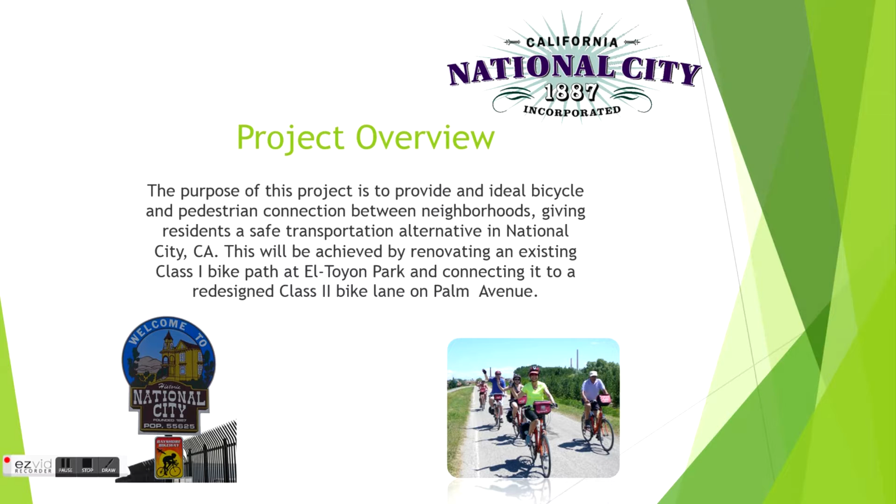My name is Christian Aguilar, and I am the project manager of DVA and Associates. This video is for the El-Toyon bicycle route in National City, California. The purpose of this project is to provide an ideal bicycle and pedestrian connection between neighborhoods, giving residents a safe transportation alternative in National City, California. This will be achieved by renovating the existing Class 1 bike path at El-Toyon Park and connecting it to a redesigned Class 2 bike lane on Palm Avenue.

This is the DVA and Associates team. We have Christian Aguilar, Project Manager, Specialist in Transportation and Construction. Rudy Zelaya, Specialist in Construction. Michael Donvecchio, Specialist in Transportation and Structural. Daniel Diaz, Transportation Specialist. Elizabeth San Pedro, Stormwater Specialist. And Daniel Lopez, Transportation Specialist.

This project is taking place in National City. National City is a dense urban community with a median income of $37,000. This plan will be put on through various programs: the National City Capital Improvement Program, the National City Bicycle Master Plan, and the Active Transportation Grant that was awarded in 2014 for this specific project.

In National City, the current facilities and existing conditions are as follows. There is a current bicycle path about half a mile long that is in serious need of improvements. There is a current street, Palm Avenue, that is a collector street with a posted speed limit of 35 miles per hour. It has parking on both sides of the street currently, and as of now, there is no bicycle path or Sharrow designation for bicycle riders. As for current bicycle facilities in the vicinity, there is 4th Street, which has modern bicycle facilities, Class 2, and it will be critical to connecting our proposed plan and making it one universal route.

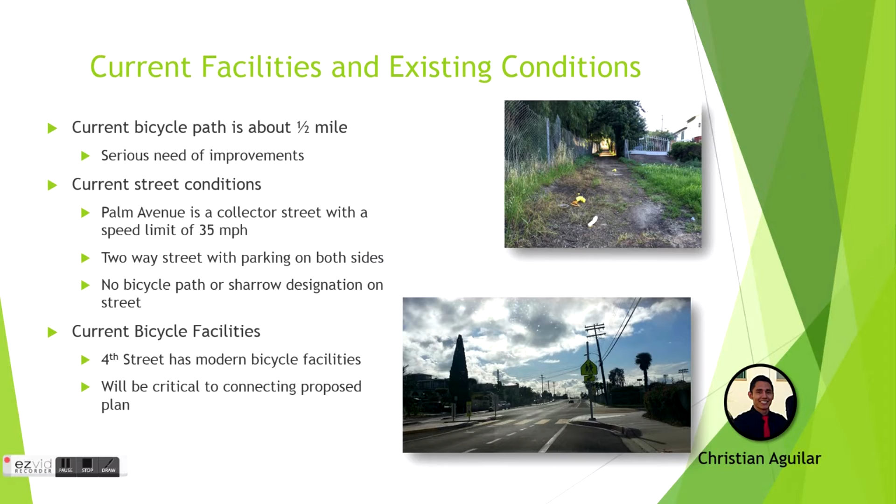Before designing the El-Toyon bicycle path, several steps in planning and research had to be considered. In regards to the site research, pedestrian and bicycle counts were conducted along each alternative. In addition, traffic counts and parking usage analysis were performed. This research would eventually aid in our decision of which alternative worked best for our project. To aid in our planning, the National Association of City Transportation Officials, NACTO, Seattle Broadway Bikeway, and U.S. Federal Highway Administration were utilized.

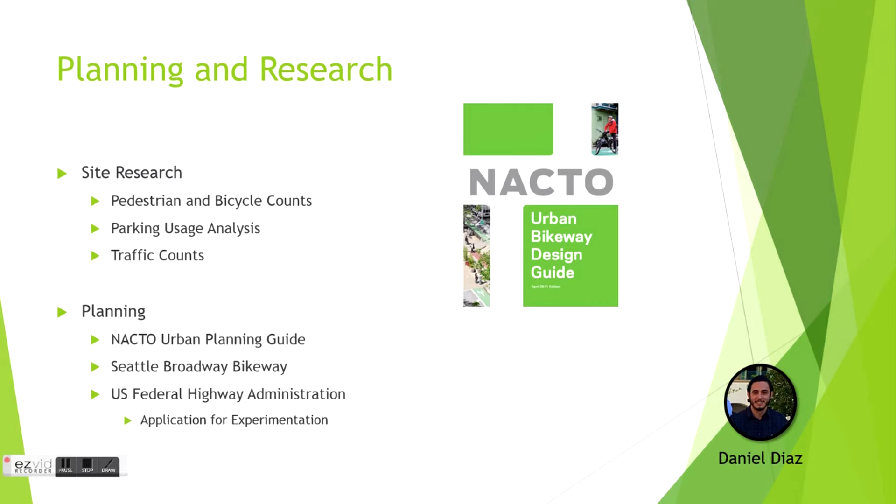DVA and Associates decided it would be valuable information to have an understanding of the pedestrians, bicyclists, traffic, and parking activities. As a result, studies were conducted and it was determined that Palm Avenue had the lowest average speed of approximately 35 miles per hour, a parking availability of 50% during peak hours and 70% during non-peak hours, and also it had the highest pedestrian and bicyclist activity.

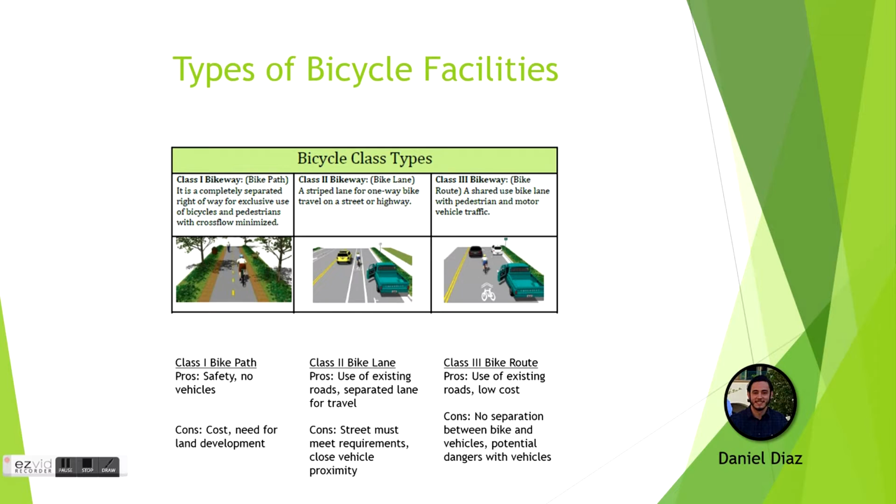One of the main aspects of our project was determining the classification of the bike facility. A Class 1 bike path would be most safe because it is completely separated from vehicles and is exclusively used for bicycles and pedestrians. A Class 2 bike lane is a separated striped lane on an existing road. This option is less safe as cyclists are closer to vehicles. Finally, a Class 3 bike route is a shared bike lane which is used by both cyclists and motor vehicles. This facility is the least safe of the three options.

In order to choose the best alternative, we decided to compare 3 possible routes. These routes ran along Euclid, Grove, and Palm from 22nd Street to 4th Street. Each route was selected based on their proximity to sites of interest such as schools, parks, shopping centers, and bus stops. With this being said, 3 different studies were conducted on each alternative in order to determine which one was the safest and most effective route to be utilized by pedestrians.

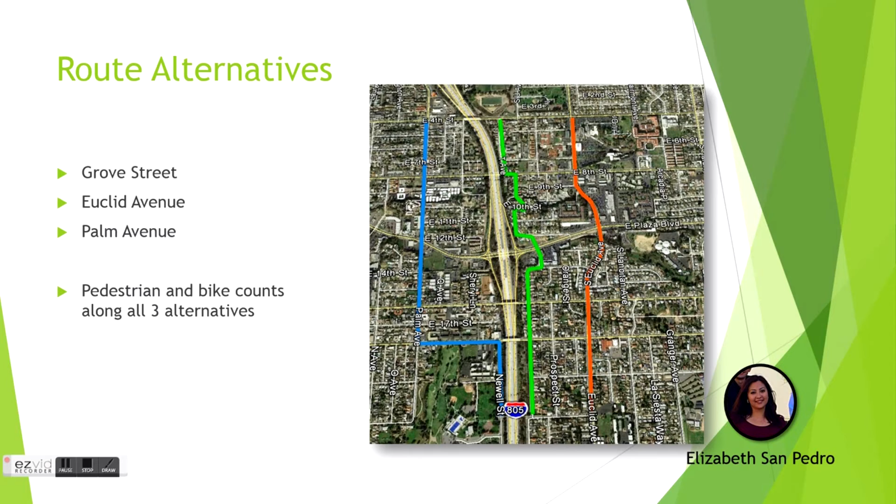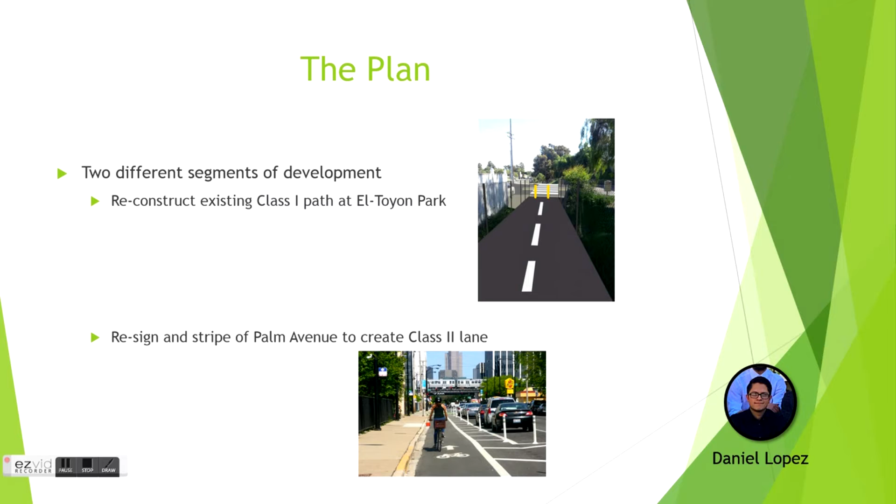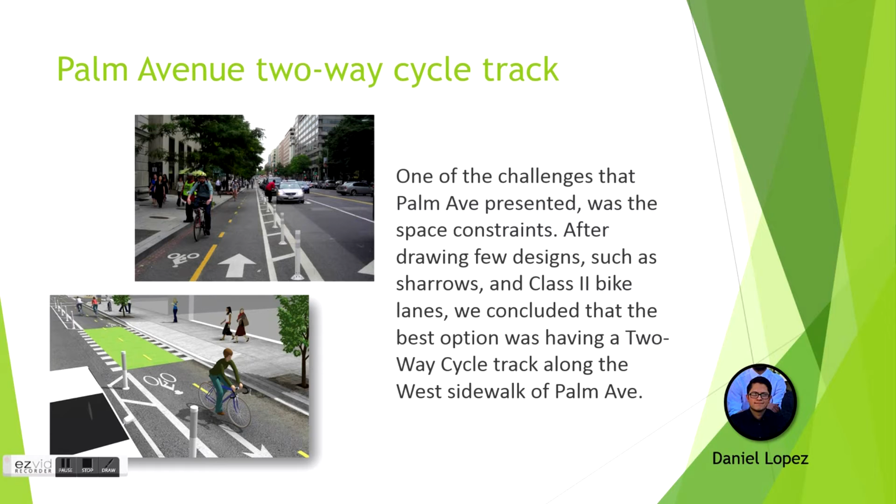The plan includes 2 different segments of development. The first one is to reconstruct the existing Class 1 path at El-Toyon Park, and the second one is a re-sign and restripe of Palm Avenue to create a Class 2 lane. The on-street portion of the corridor along Palm Avenue, 18th Street, and Newell Street has relatively low volume and low speeds and requires minimum, if any, volume and speed reduction measures.

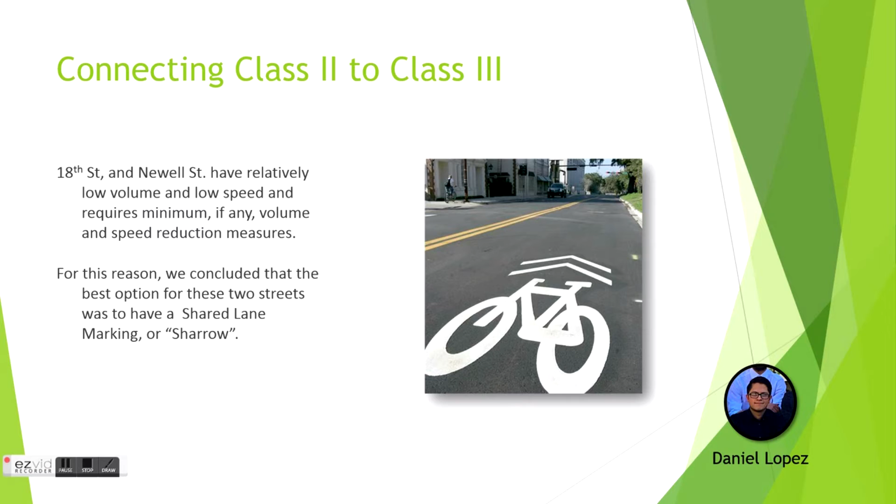Beginning on East 4th Street, at the corner of El-Toyon Park, an existing half-mile-long Class 1 bike path makes its way to South 47th Street. This bike path skirts the west side of El-Toyon Park, stopping on the south side of East Division Street, and then starting back up again on the north side of the street and continuing through to East 47th.

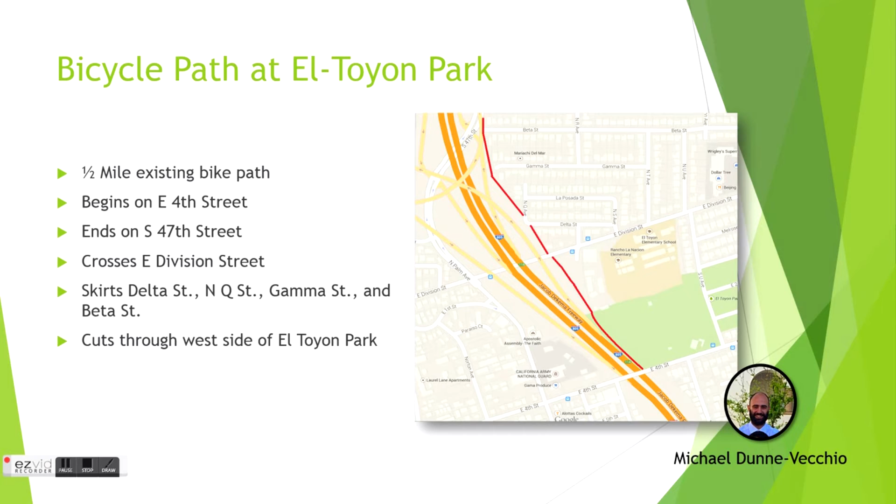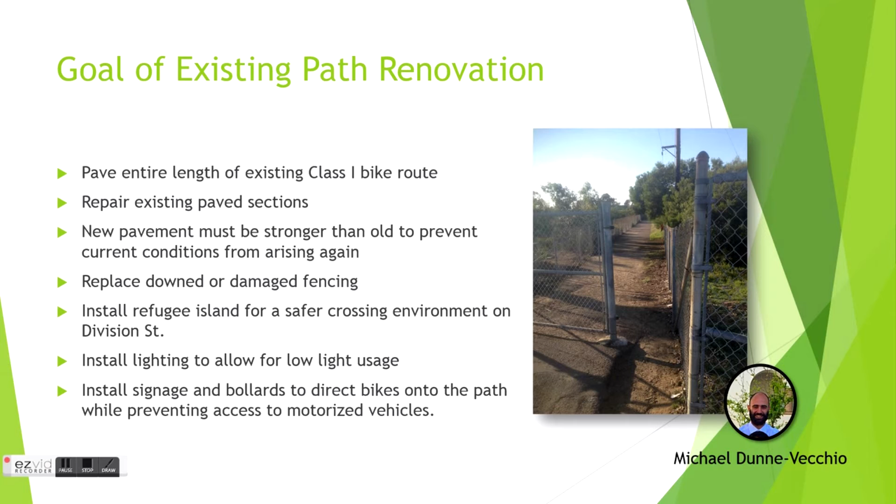Our goal was to revitalize and renovate this portion of the planned bicycle route to make it more user-friendly and appealing to the community. The replacement of the existing asphalt path is a necessity, as the entire half-mile length is in severe disrepair. In a few locations, damage to the parallel fencing will also be repaired, or in extreme cases, replaced entirely. To facilitate safer crossing of Division Street, a refuge island will be constructed.

Solar panel lights will also be installed along the entirety of the Class 1 path to promote the use of the facility at night. Clear signage will be put in place to direct bikers and pedestrians, and removable bollards will be strategically located at entrances and exits to prevent access by motorized vehicles. These bollards will be locked in place and only removable by a city employee or emergency personnel with the proper key.

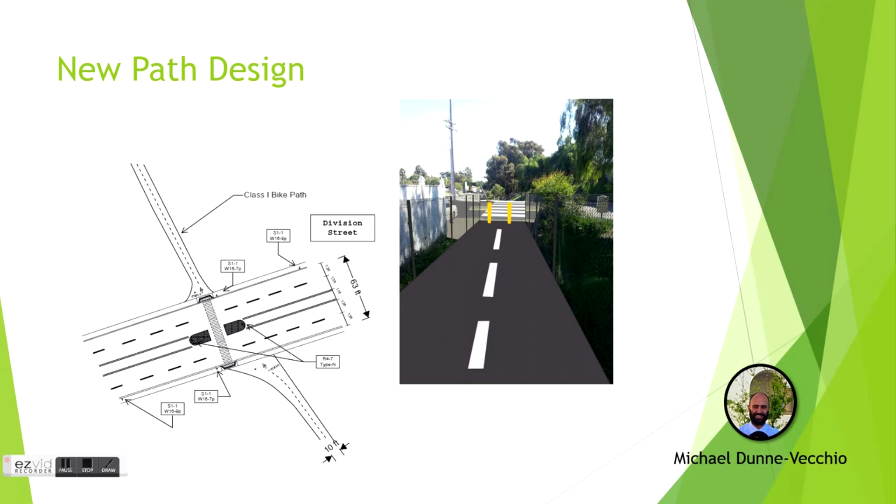The proposed bike path and the Class 3 sharrow markings and bicycle signage along the path will improve the sight and visibility of cyclists and pedestrians crossing at the intersections. The signage and marking will also help to reduce behaviors that lead to cyclist-motorist collisions by increasing driver awareness of bicycles along the bike route.

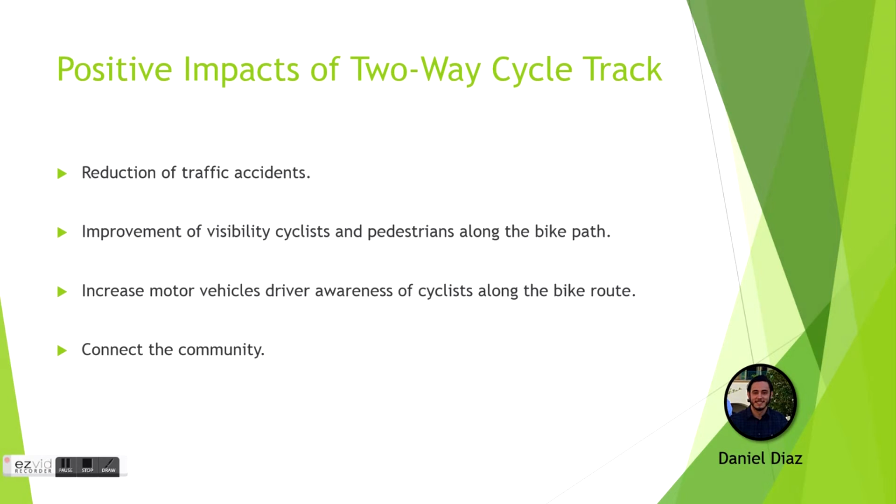In order to properly design the new path, an understanding of the local soil conditions, along with County of San Diego roadway standards, were required. Data on soil type and properties were researched, and path width, cross slope, and thickness were calculated using various tables and equations from the California Highway Design Manual, County of San Diego Public Road Standards, and California's Flexible Pavement Structural Design Guide.

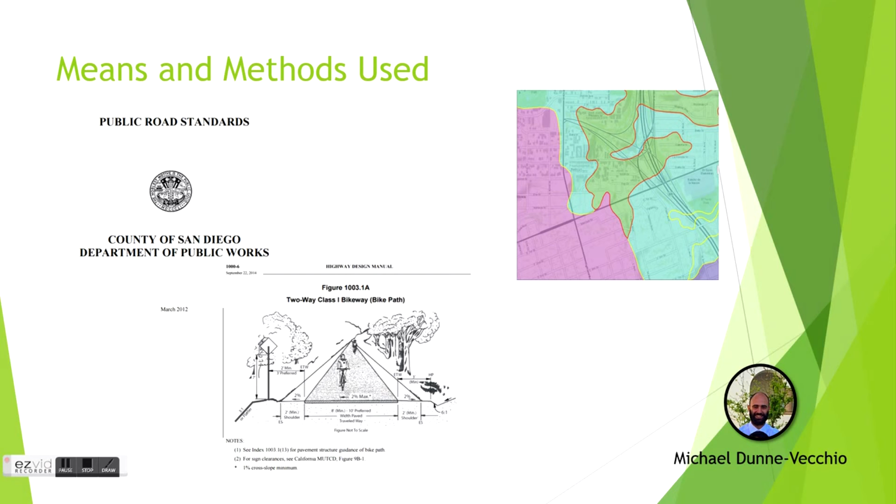The National City Bike Corridor will span approximately 2 miles of roadway. Around half a mile will be demolition and installation of new pavement. The remaining 1.5 miles will consist of a new cover coat of existing roadway, new striping plans, and construction of new pedestrian safety islands.

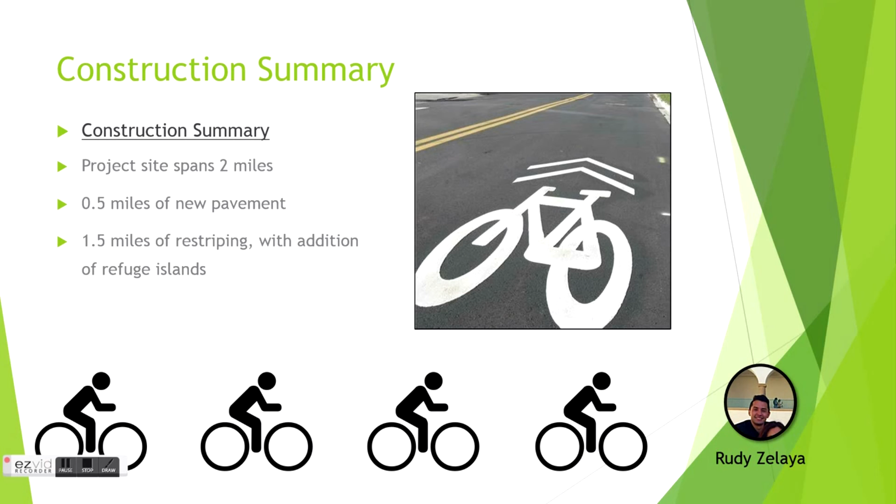The total project budget is $800,372. This cost estimate includes complete bid schedule prices along with assumed construction fees. Activities such as mobilization and traffic control have been estimated through the use of standard percentages of the total sum of all line item budgets.

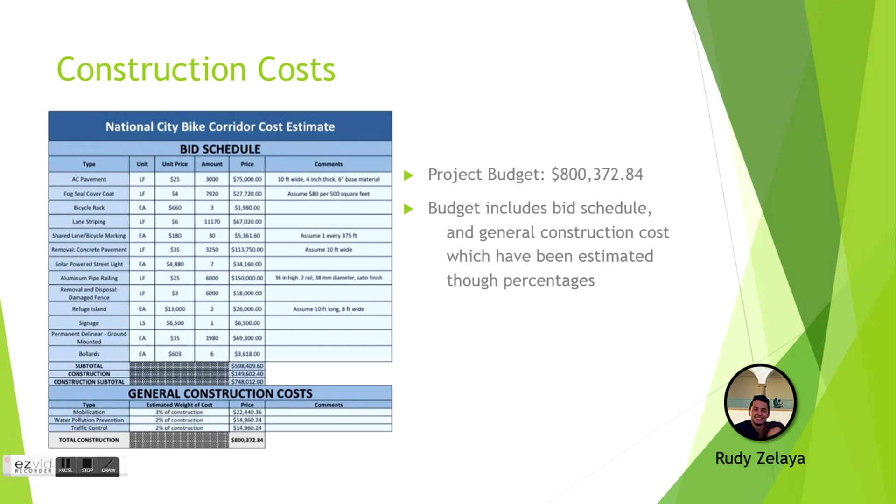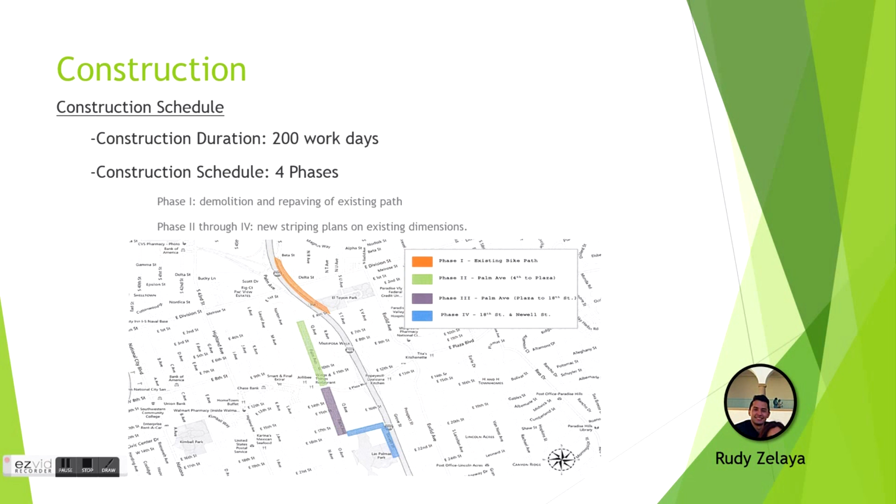The construction schedule duration is a total of 200 days. In order to mitigate any detrimental increase in traffic during the construction phase, the project has been broken down into 4 phases. Phase 1 will include the demolition and repaving of a multi-use shared path. Phases 2 through 4 take existing roadway segments and add refuge islands, along with new striping dimensions.

DVA and Associates developed a water pollution control plan in order to implement BMPs during the construction phase and reduce the discharge of pollutants into the City of National City's stormwater conveyance system. A few examples of the BMPs that will be used are stockpiles to prevent soil particles from detaching and transporting into the stormwater runoff, preservation of existing vegetation for plants to serve as erosion and sediment control, fiber rolls, and gravel bags to capture any soil particles that might have detached over a period of time.

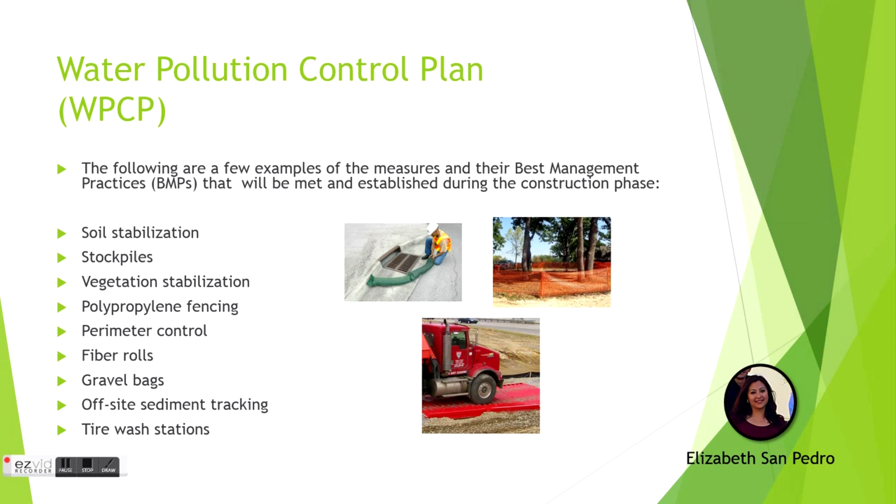This concludes our video for the El-Toyon bicycle route.